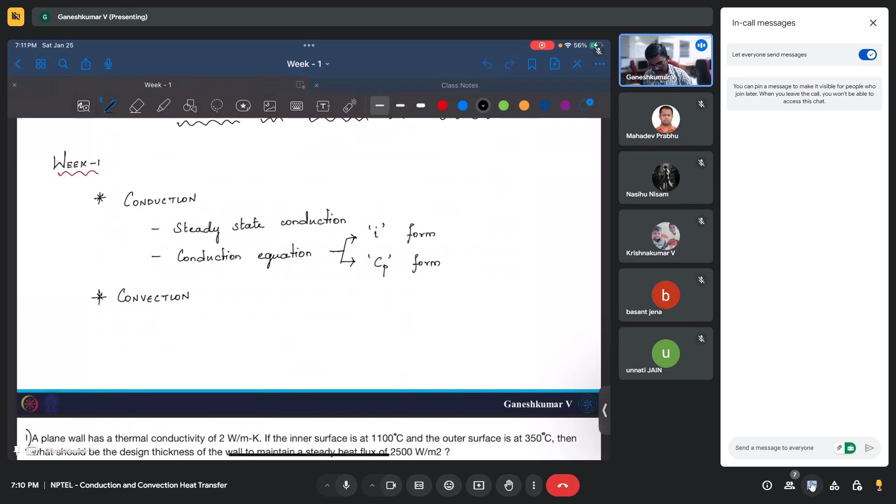I have 5 problems today. Actually I have 6, but if possible we will solve the sixth one. If not, we will solve it in the next session. Because the sixth one requires a bit about the energy equation, which the professor briefly derived, but it's not yet complete—he didn't give the full picture till the first week videos, so we should go through the second week videos also.

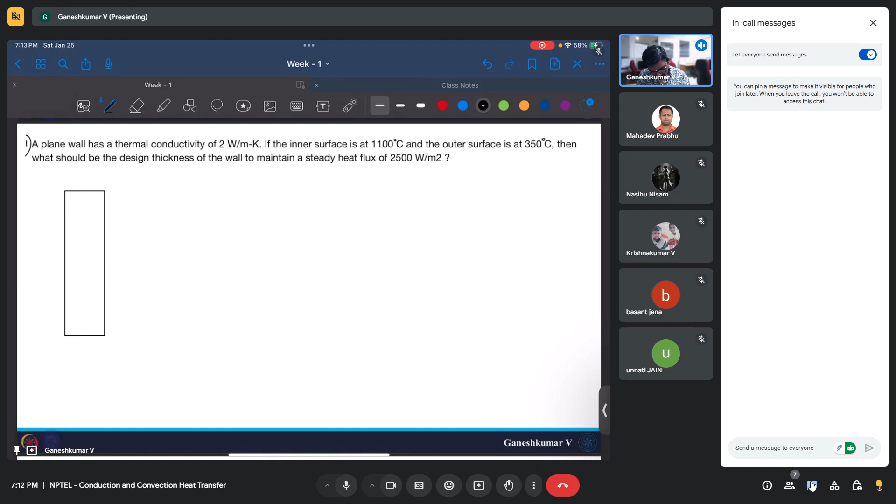Let me draw a simple plane wall so that you will get an idea what this question is about. So this is like a simple plane wall. Okay, and let's consider this as the inner side and this is outer.

Okay, so we have inner side, let's call it Ti, and outer side To. What has been given is this plane wall has a thermal conductivity of 2 watt per meter Kelvin, the inner surface is at 1100 degree Celsius, and the outer surface is at 350 degrees Celsius.

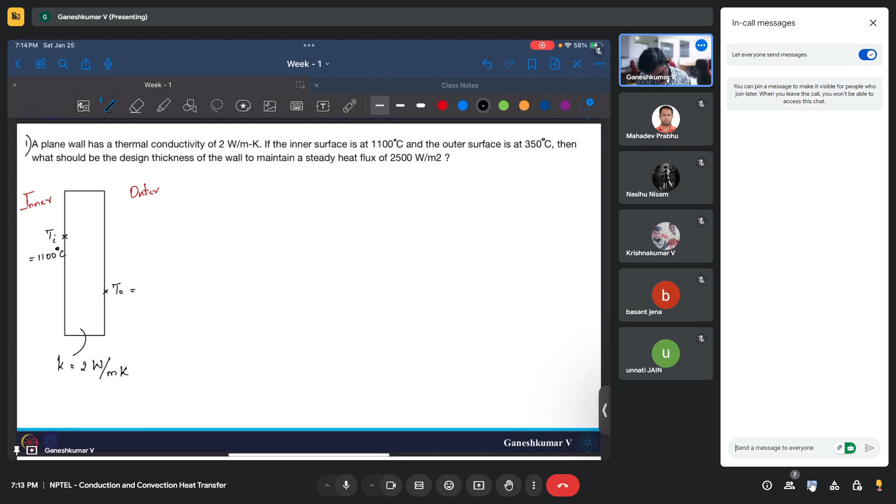What they are asking is, let's say my heat flux is steady heat flux, please note that this is a steady heat flux. We denote heat flux as small q double prime, where double prime means per unit area, the notation we usually use for fluxes. So for heat flux, this would be 2500 watt per meter square.

If we have this steady heat flux, what should be my delta x, or what should be my thickness? Let's call it L, or you can call it T. What should be this thickness is what they are asking.

Let's write down some of the assumptions we are going to take here. It's a steady heat flux, or steady state condition, which means the profile is fully generated, it is not dependent on time. The dependency of temperature field with respect to time is not there, which means T is not a function of time. T is only a function of space, that is what it means.

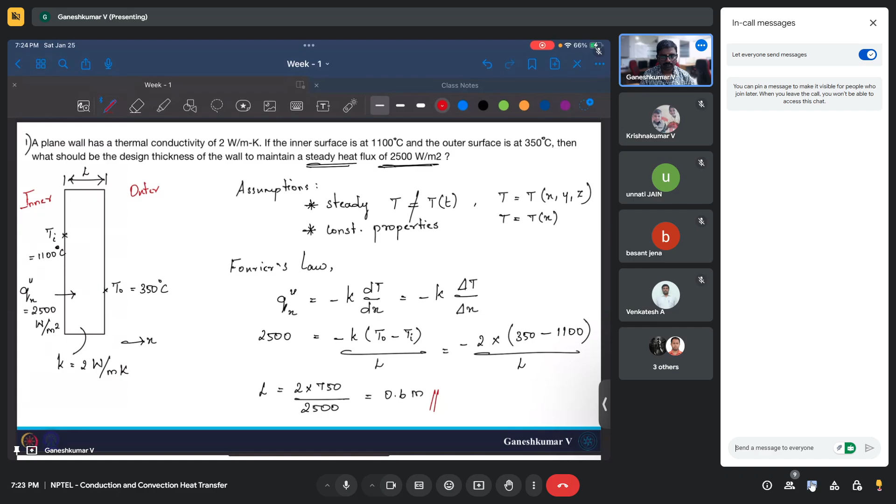All right, I think the first question is there. If there are any questions, please stop me. You don't need to wait for me to complete the problem. You can stop me at any point and ask your questions. I hope there are no doubts in the first question. If not, feel free to ask.

So if there are no questions, let me move on to the second question. This is also like a warm-up question. You guys must already know it. Let's see what this question says.

There is a back surface of a plate which is heated at a rate of 100 watts per meter square, and the front surface is cooled by airflow at 30 degrees Celsius. It is given that the heat transfer coefficient between air and the plate surface is 50 watts per meter square degrees Celsius. Considering steady state heat transfer, what is the temperature of the front surface of the plate?

Okay, so basically you have a plate. Let's say, how can I draw the plate? Maybe I'll draw it in a horizontal direction. So this is the plate, and the back surface of the plate you are heating it.

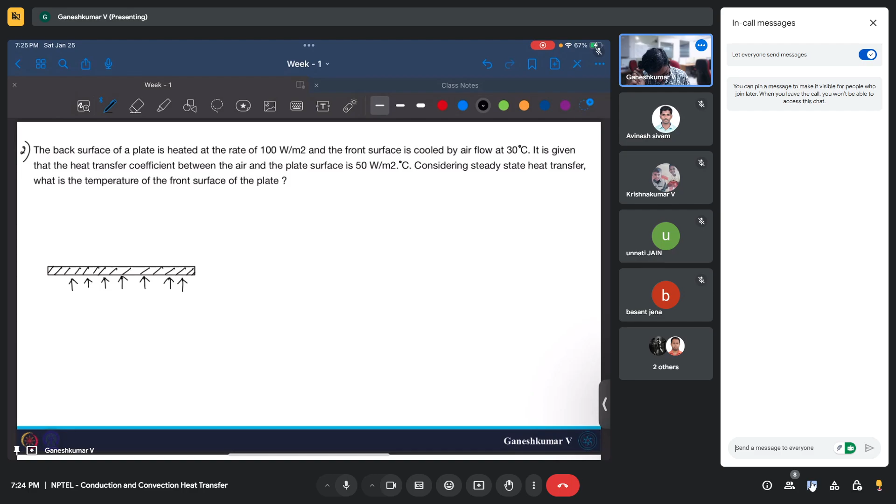Maybe I will draw this as the y direction. So Qy is 100 watts per meter square. And on the top surface you have air, which is going to cool the surface of the plate. The air temperature, let's call it T infinity, is 30 degrees Celsius, and air is flowing. Air can flow however it wants, but it cools down the top surface of the plate.

So what they are asking is, what is this surface temperature, Ts? And what they also gave is H, the heat transfer coefficient, to be 50 watts per meter square degrees Celsius.

Again, you can write down the assumptions. The assumptions will be steady state heat transfer, and also constant convective heat transfer coefficient. That is one of the assumptions we are making. And the plate is uniformly heated - that is one more assumption. The bottom surface of the plate is uniformly heated with 100 watts per meter square.

Maybe I will write it down one more time here: steady state, uniform heating. So if the plate is not heated uniformly, what do you expect to happen?

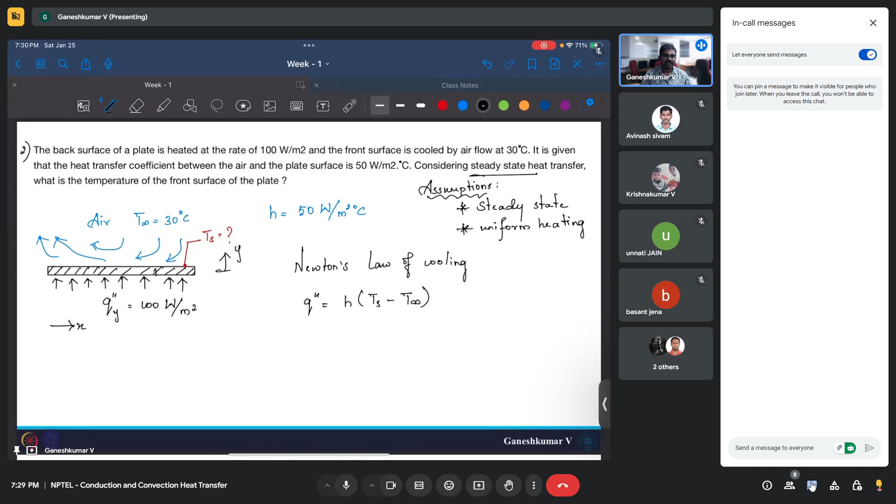H times Ts minus T infinity. We need to find Ts. H is given, heat flux is given, and T infinity is also given. So we just need to find Ts here.

Is this clear? Why didn't we use conduction? We use the convection formula here. I hope it is clear. If not, please let me know, I can repeat.

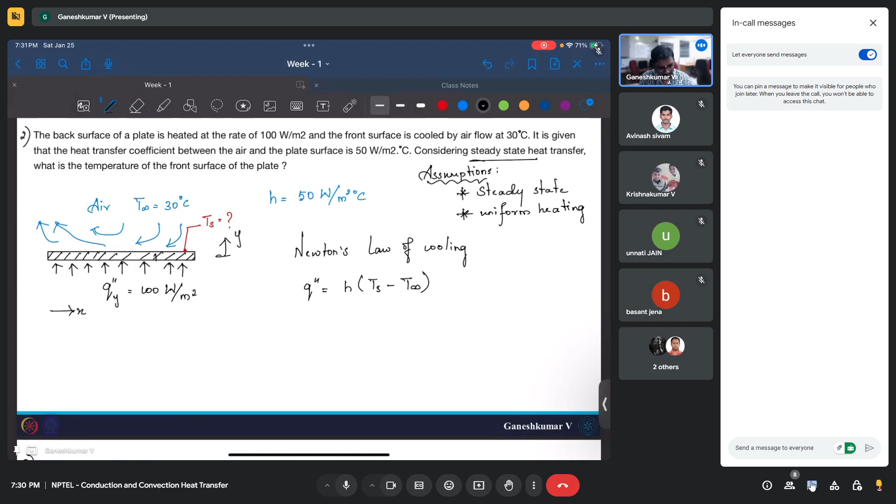So if this is the case, we have 100 watts per meter square, which is equal to H is 50, and Ts, which is what we need to find, minus T infinity is 30 degrees Celsius. If this is the case, what happens? 1, 2, Ts is nothing but 30 plus 2, which is equal to 32 degrees Celsius. This is what we are supposed to find.

So if you change the heat flux, if you increase the heat flux, the surface temperature is going to increase, right? So if I increase the heat flux to 200, the temperature becomes 34 degrees Celsius, which makes sense. If you have higher heat flux coming out, the plate would be very hot. So 32 becomes 34, that is what it means.

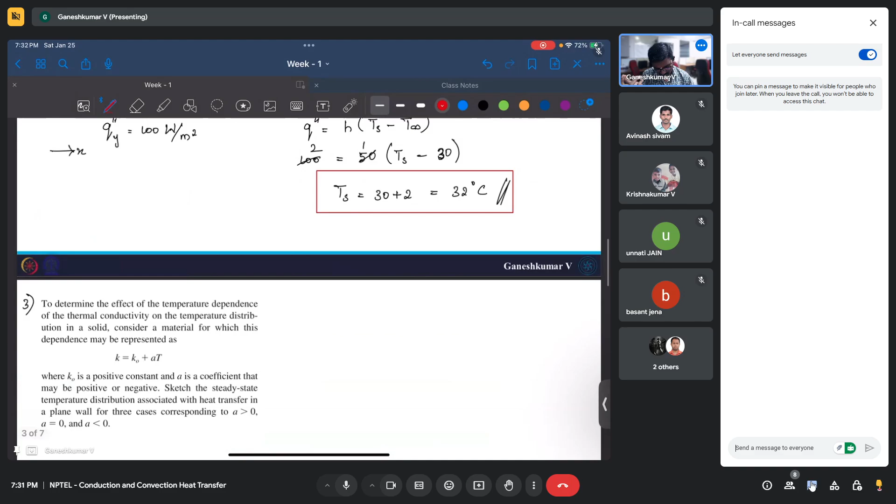All right, I hope this is also clear. This is, again, a direct application of conduction and convection formulas. If there are any doubts, please let me know. If not, I'm moving on to the third question that we have here.

The third question is a little bit different. We haven't done this in the lectures, we discussed it a little bit. The professor used to say that K, you can take isotropic, and you can take it to be constant, and you can solve it. But here it's something different.

This is more representing reality. In reality, you cannot take thermal conductivity to be constant. Let's say once you graduate from engineering and enter some industry, and you are expected to do heat transfer analysis, at that time you cannot put thermal conductivity equal to constant. It would be very nice to solve the problem that way because it would be very easy, but in reality that is not the case. Thermal conductivity varies with temperature, sometimes it increases, sometimes it decreases. We also saw that for different materials it behaves differently.

Here I'm taking a more general case. So what this case says is to determine the effect of temperature dependence of the thermal conductivity on the temperature distribution in a solid. Let's say if you have a solid and it is subjected to different temperature gradients. Now if that solid has a thermal conductivity which is a function of temperature, then how does the temperature distribution within the solid vary? That is the question basically.

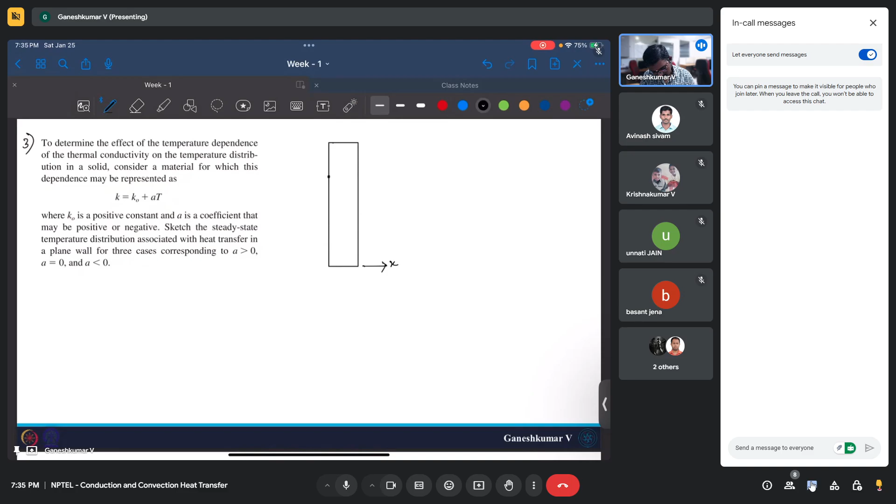Let's say this side the temperature is T1 and this side the temperature is T2. This is the X direction, so we know that temperature is going to be a function of X in this.

Let's say if I have a heat flux coming, Q double prime X, this is going to be steady state. Again, we are going to make this assumption of steady state. In steady state, heat flux remains constant, and it will be the same for every section of the plane wall. Heat flux is not a function of time.

Also if it's a plane wall, we assume it is not two dimensional, it is only one dimensional. The heat flux is going in only one direction, and if that is the case, we do not have any heat generation, which means every section will have the same heat flux.

Okay, which means basically the heat flux Q double prime X is a constant. Let me write that down also, which is the case that we saw in the last two problems also. Q double prime X is a constant. Last problem was Q double prime Y is 100 watts per meter square. In this problem, it was like 2500 watts per meter square. It is not varying with respect to X or something.

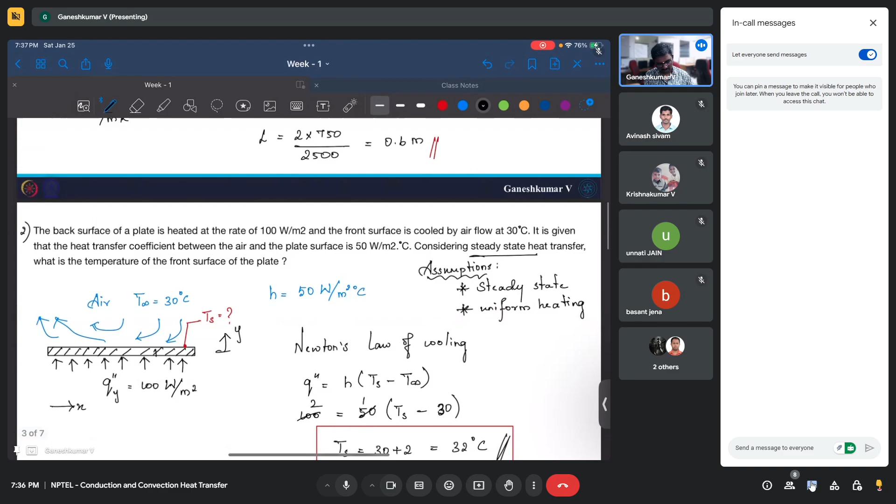So this problem also, we are going to make that assumption. And the temperature, again, we are doing only one dimension, so temperature is a function of x only. Now the question is, you have thermal conductivity which is k naught plus a*t, and a could be either 0 or positive or negative.

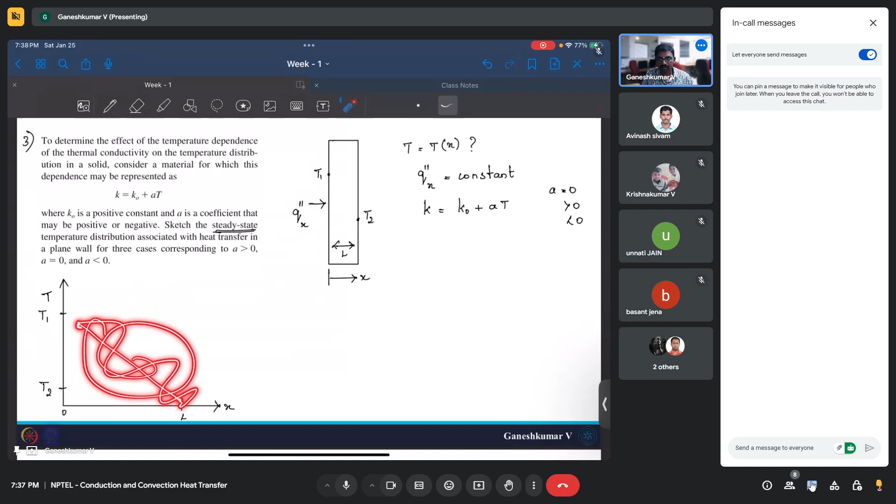Okay, all these three cases, how the temperature distribution will be is what we need to sketch. Let's say if I draw this diagram in terms of x and t graph. You have t1 here, you have t2 here, this is 0 and this is some L. Let's say this distance is L. So how will the temperature vary is the question - whether it varies linearly, whether it varies like this, how it will vary is the question.

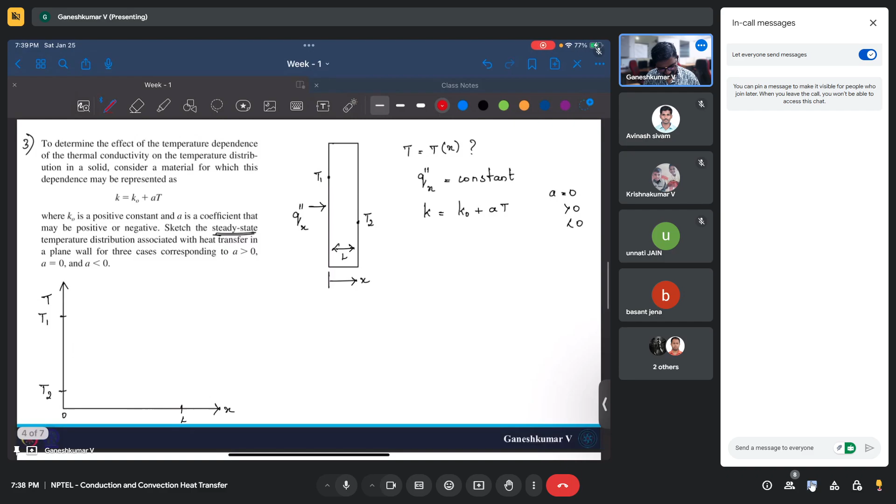Okay, so do you have any idea how we can proceed with this? I think linear. For which case? We have three cases: a equal to 0, a greater than 0, and a less than 0. So let's say I will take a case first: a is equal to 0. K is equal to K0.

K equal to k0. So how would the temperature profile look, or how will you proceed with this? K is equal to K0. How will you find the temperature profile? So your answer is actually right, it will vary linear, but how did you come to that conclusion?

One thing we can also write is, this is 0 and this is L, right? So temperature at x is equal to 0 is known: temperature at x is equal to 0 is T1, and temperature at x is equal to L is T2. Which means it is going to start here and end here. This is the starting point, this is the ending point for the temperature distribution.

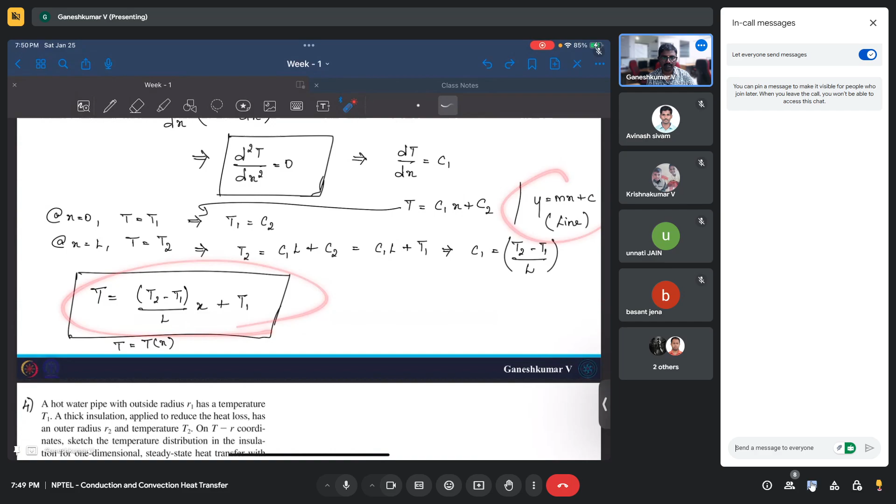And you can draw these three lines and you can write it's a straight line. Basically, you can do this for every point in this line. And then you can just plot them and see how it varies. Okay, so in this case, what happened was this is a linear line, and we also found out its equation for a line. So this is how you will find out the temperature distribution or the shape.

Now I will tell you, instead of going through all this mathematics, you can simply use your logic to find out the same thing. Okay, so this is the line, let me write it down. This is the line for A equal to 0, which means we have a constant thermal conductivity, and we know that it's going to give a linear profile, and this is what exactly we got after doing all the mathematics. Okay, you can repeat the similar mathematics for A greater than 0, A less than 0, and you can apply logics and you can find it.

But now I'm going to give you a more easier way to do this. Okay, we can just, once you know this, this itself has the idea of how the temperature profile varies. Okay, so what I said here is you have heat flux which is constant.

Before we go into that, is there any problem with the mathematics that I derived till now? I hope everything is clear. How did we get the temperature and how did we get it's a straight line? Everything, I hope it's clear. Okay, so if there are doubts, please stop me anytime and I would be happy to repeat it.

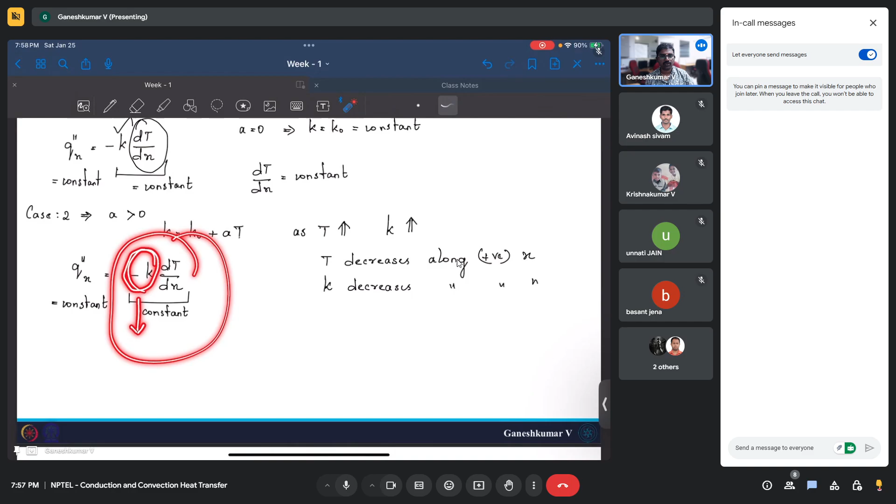Now the question is, how does dt by dx vary along positive x? Now let's try to find out what is here. The k here is decreasing with x, and now if you want to make this whole term constant, what you have to do is increase the temperature gradient. Because one quantity is decreasing, which means the other quantity should increase, so that both will cancel each other out and give a constant heat flux. So constant heat flux is true. That's why if k decreases along x, the dt by dx should increase along x, because then only it will satisfy Fourier's law of heat conduction.

Is that clear? Yes, sir. Yes, sir. Okay.

Now, if dt by dx increases along x, which means gradient is also changing, which means slope is also changing, right? If the slope increases along x, how will we draw this line? Think mathematically, you will find the answer. I think it should be uphill.

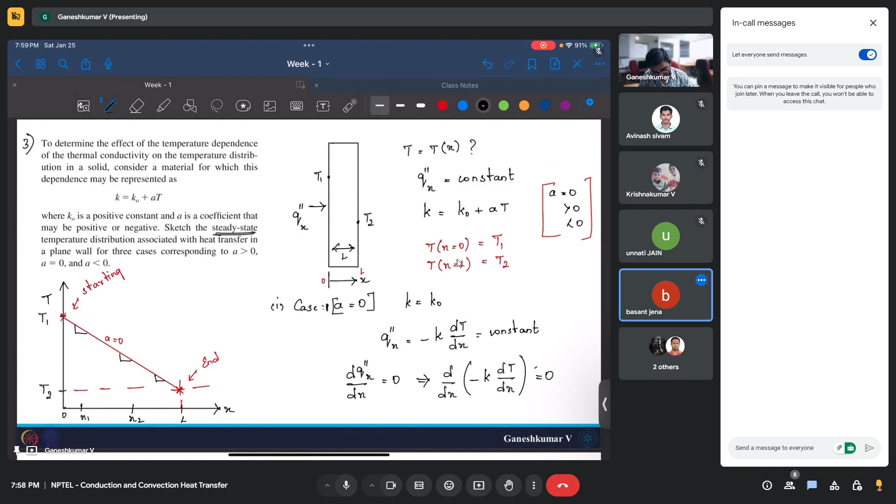It should be uphill, right. Wonderful. So again, it should start from here. It should end at T2. There is no change in that. The boundary condition is fixed. Only thing is, it will look something like this. That's it. This will be A greater than 0.

So what I'm saying is, dT by dx continuously increases. Our gradient continuously increases. That is what you see here. The gradient here is less. The gradient here is very less. However, the gradient here is very large. Which means, as you go from the temperature along the positive x, the gradient is continuously increasing.

Okay, so let's say if I want to draw how the gradient varies along x, this is another graph. This is x, this is dt by dx. Actually, gradient is negative, so...

This is x. So this is for a equal to 0, and when x increases, dt by dx continuously increases. And it increases in the negative direction. That is something you need to note. It increases in the negative direction. This is for a greater than 0.

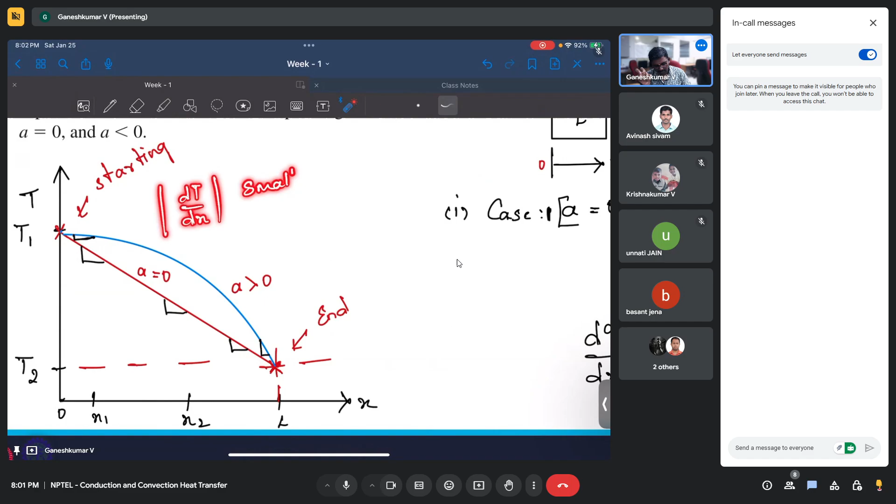Yes, sir. The dt by dx is small here, but also it's negative. That's why I plotted in the negative direction. The plot is something like this, in the negative direction.

In the fourth quadrant you will have very small gradient over in your x is equal to 0. However, you will have a very large gradient at x is equal to L. This corresponds to a very large gradient. That is why you will have a gradient to be decreasing.

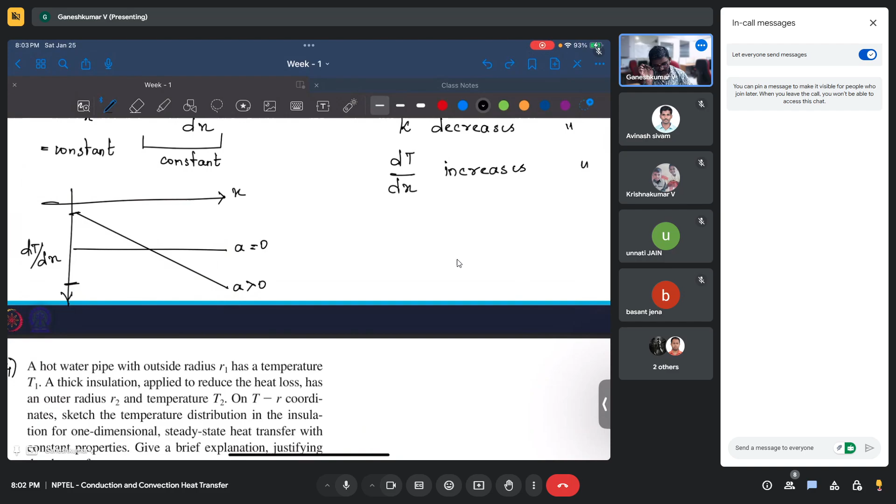And one more thing, this need not be a straight line. It could be something like this also, it could be something like that also. However it can be, but it should continuously decrease. We don't know exactly how dt by dx is a function of x, but only thing is it strictly increases in the negative direction.

All right, so that is how you got this profile. This is for a greater than 0.

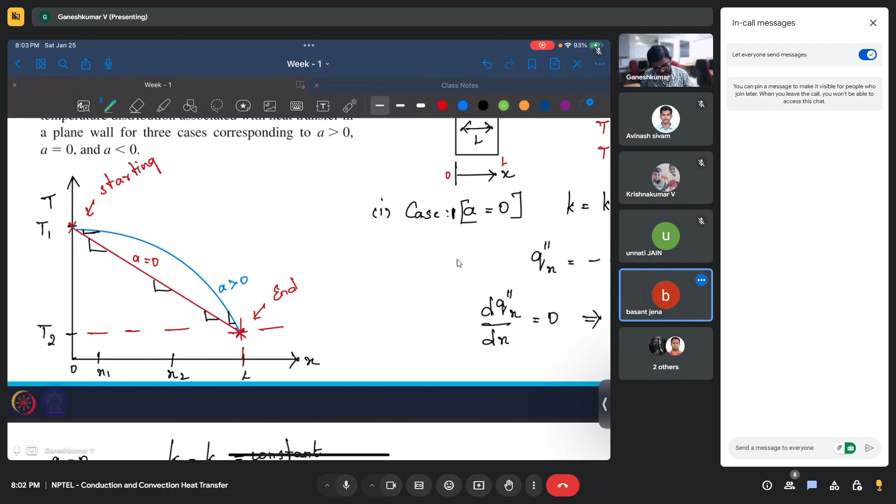Now you guys can directly say how a less than 0 would be. It's going to be just opposite of this. You can repeat this same thought process, and you can see for yourself how it will vary. So it is going to vary as you suspected, something like this.

Sir, will all these recordings be available to us? Yeah, it will be available, don't worry about it. Okay, sir. Thank you. Thank you. But if you have doubts, don't feel shy. I will be happy to explain multiple times. Once we have to do it ourselves, no problem, it will be helpful. No problem.

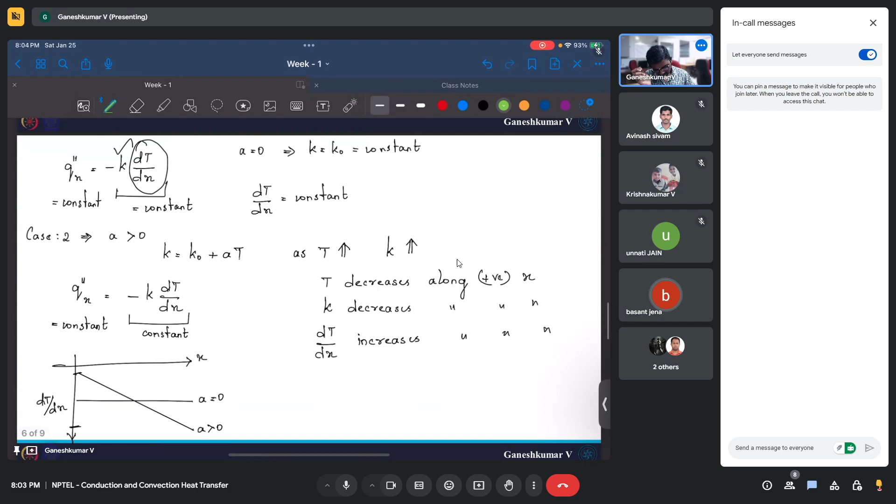Right. So this is the second approach. This is the easiest way, just based on thinking, you can find out how it will vary. The other approach is you can do this derivation again, and you can come up with this expression, and you can plot that using a software, let's say MATLAB or Excel sheets. If you're plotting it, then you will come to know it also varies like this. So it's a very far-fetched process. Instead you can just simply use an intuitive approach, and you can find it.

All right, I hope for question 3, I skipped a few parts - the case where a is less than 0. I didn't do it, but I hope you understand the gist, and you can do it on your own.

All right. All right.

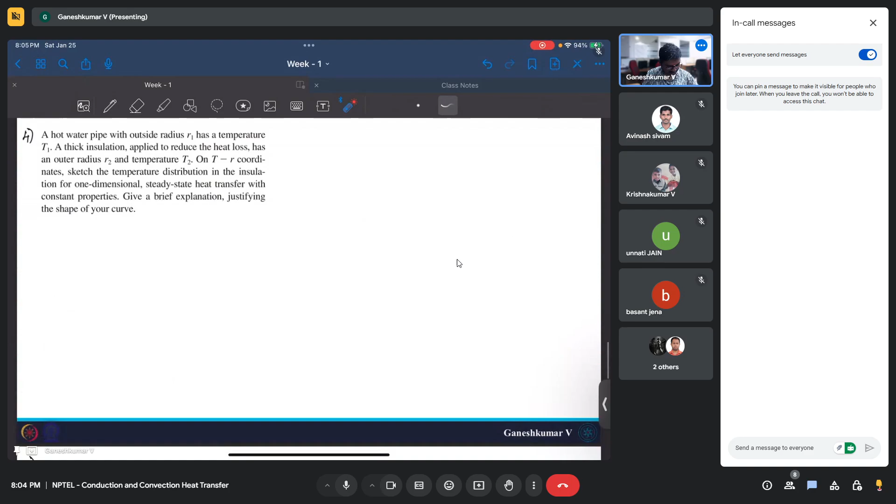So I thought I would be able to finish this by 8, but it's taking some more time. We'll quickly go through these two questions, and then I'll leave it up to you guys to ask any questions. So the fourth question is a little bit different, which we didn't touch in the lecture,

because it's in cylindrical coordinates. Till now we studied only Cartesian coordinates. Now we are going to do cylindrical coordinates.

Here we are talking about a hot water pipe with outer radius R1. There's a pipe, and hot water is flowing through it. It has outer radius R1 and temperature T1. Now we are applying some thick insulation to reduce the heat loss. So when you apply insulation, the heat loss reduces, and it has an outer radius of R2 and temperature T2.

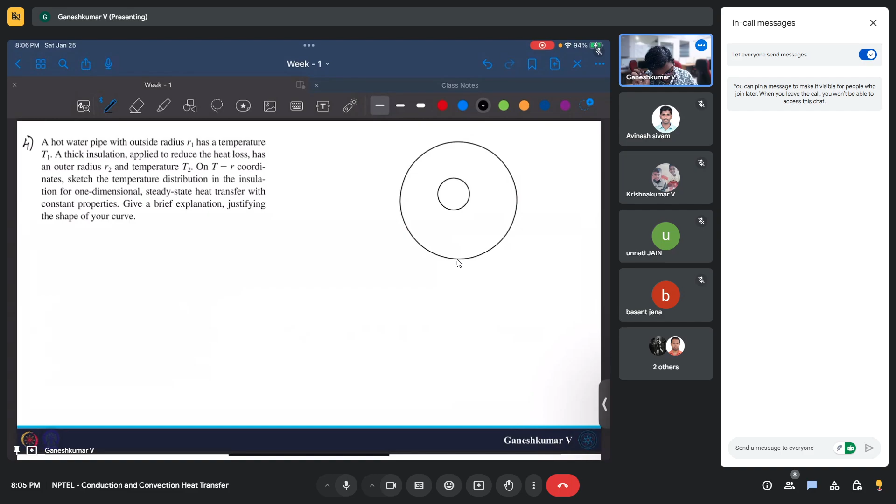Okay, so let me draw it. You have this hot water pipe with radius R1, and you have a bigger insulation with radius R2. Ideally it should be in the middle. So this is R1, and this is R2 - this is the insulation. Or probably you might think that it is water - sorry for the color choice - but this is the insulation.

Now this is at T1 and this is at T2. Now what they are telling us is: on T minus r coordinates, sketch the temperature distribution in the insulation for one-dimensional steady state heat transfer. You can assume steady state, constant properties, and one dimensional. Give a brief explanation justifying the shape of your curve.

What would be the temperature distribution if you were going along the R direction? Let's say this is the direction you are going for. How would the temperature vary? Basically in the previous problem, we studied how temperature varies along the x direction. Here we are trying to find out how it varies along the r direction.

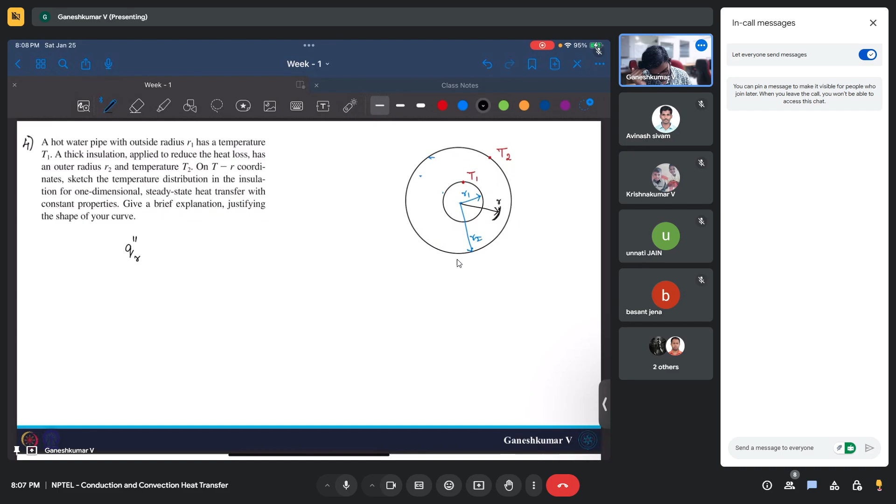Again, it's a steady state heat transfer, so we have heat flux to be constant along the radial direction. That is one difference. So let's say heat flux is equal to constant - or in this case, I'm going to write it in terms of heat, not heat flux. The heat is constant. We will understand why.

So there is this water flowing, and it is hot, and the ambient temperature is cold. So there's a potential - the heat flows from the hot water pipe to outside, but in between it sees insulation. So a lesser amount of heat passes through, but it doesn't mean the heat does not pass through at all. So there's going to be some heat loss to the surroundings. Now, when you have heat loss to the surroundings, along the r direction, the heat will be constant.

We will see how the heat flux varies. First, let's understand that if heat is constant, we can apply Fourier's law. Fourier's law, again, is the same: k times area times dT by dr. Here it is in terms of radial coordinate. Now the question to you guys is, what is this A? How will you write the A?

So we all know A is the surface area - the internal surface area, for any radial direction. What will that be? It will be the circumferential area - circumference multiplied with length. So A will be the perimeter, which is 2 pi r, the perimeter, into length.

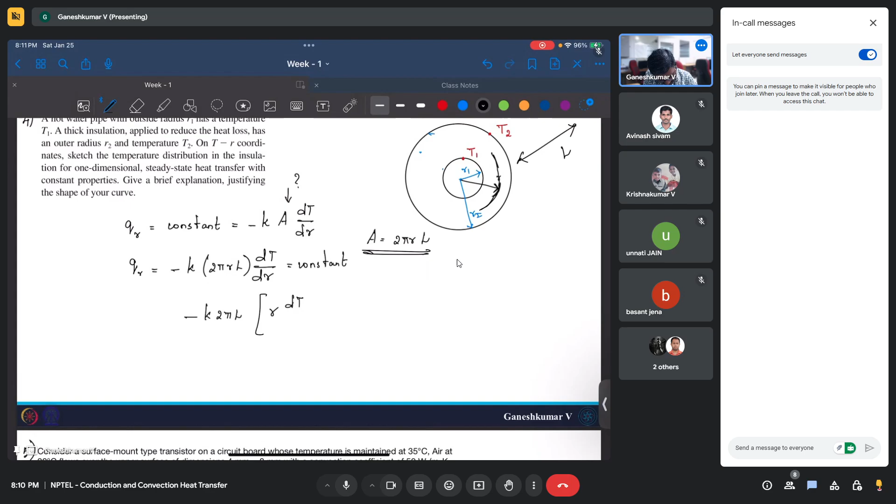So we can write this Q_r to be minus k into 2 pi r L times dT by dr. Now we know this is going to be constant, and 2 pi and L we take to be constant, so this boils down to r times dT by dr. Let me write down the equation: minus k 2 pi L times r into dT by dr is equal to a constant.

And I can club all the constants - these are also constants - so I can write the equation as r times dT by dr is equal to some constant, maybe I'll call it C1. So this is what the Fourier law of heat conduction along the cylindrical coordinate says.

Now from here we need to find out how T varies with respect to R - this is our goal. So similarly we need to draw a graph to show this. Let's say if I draw it, this is the radial coordinate, this is temperature. I want to know how it varies along R.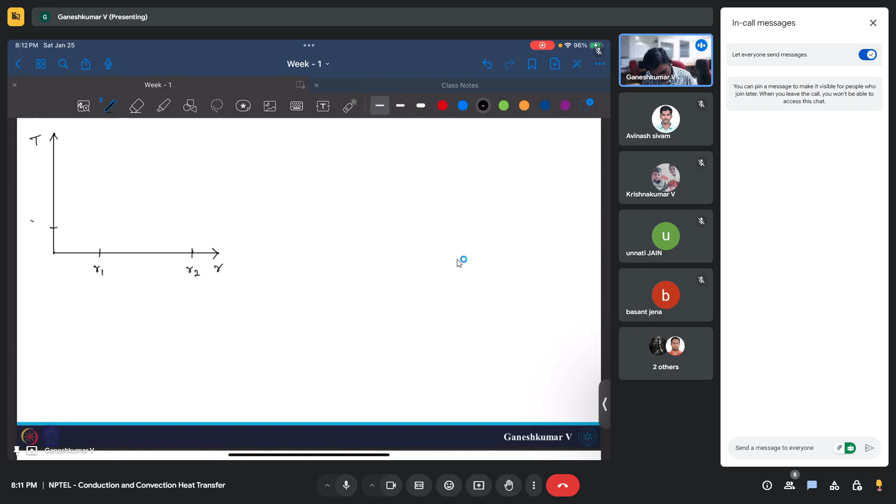So let's say I'm going from R1 to R2, and at R1 I have T1, and since it's hot water, T1 is going to be greater than T2. So at R1 you have very high temperature and at R2 you have low temperature - let's say if I extend this line, my starting point is here and I'm going to go here.

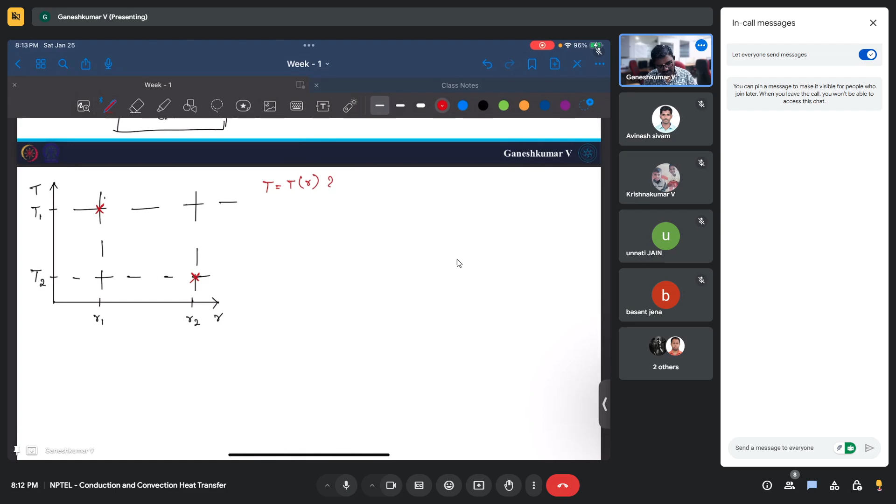Now the problem is how this T is going to vary in between R1 and R2 - what is this T as a function of R, that's the question. And for that we have a solution: R times dT by dr is constant. Now you can apply mathematics to rigorously derive it and express the solution, or you can apply some logic to tell how it varies.

Do you guys have any idea? You can apply the same logic. So maybe let me help you here - you have dT by dr equal to C1 by R.

So now your temperature gradient along the radial direction is also a function of radius. It's going to vary with respect to 1 by R, which means as R increases, the temperature gradient reduces - the gradient is more when R equals R1, and less when R equals R2. Based on this logic, we can draw this line.

So the gradient is going to be more, meaning it steeply drops at R1, and the gradient is going to be less as it reaches R2, because R2 is larger - the gradient is small near R2. So it's steeply dropping, and then as it goes down, the temperature gradient continuously reduces to a very low value at the end.

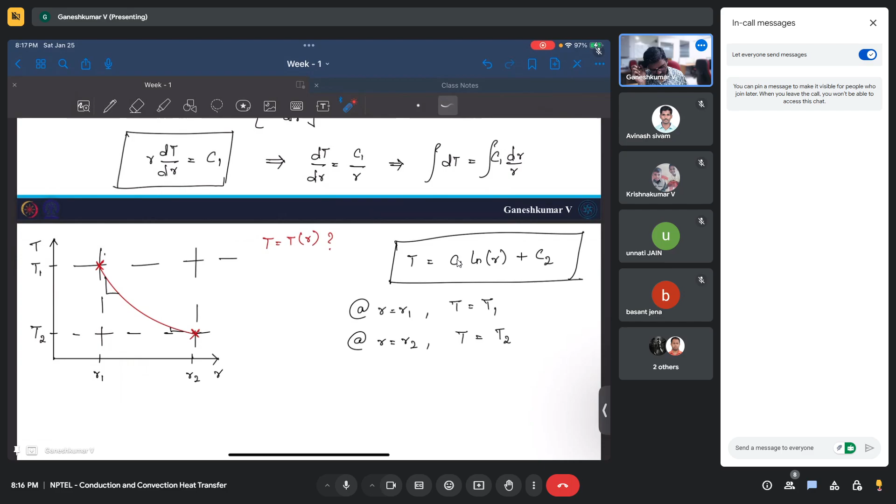Okay, and we know the boundary conditions. What are the boundary conditions? At r equal to r1, t is equal to t1, and at r equal to r2, t is equal to t2. Now you apply this boundary condition, and you can get the temperature profile. You can plot them in Excel or wherever you want, and then what you see is it is going to vary something like this.

Okay, so these are some important understanding that you need to have. The way you try to perceive this problem will be very helpful. Let's say if you are going into an interview, or if you are going to write a GATE exam also, these kinds of questions will be a lot. So how the temperature profile varies, how this works - at that time, a proper way of analyzing these concepts would be very helpful rather than deriving this mathematical relation. And we do not have access to plotting softwares while we are in a time crunch like interview or exams. At that time, this idea of how the mathematical graphs vary, the calculus idea, and the understanding of temperature gradient and the profiles will help you get a rough estimate of how things vary.

Okay, so you try to practice these kinds of problems if you get a chance, and all these problems I usually take from the Heat and Mass Transfer by Incropera book. Which I find important and necessary to discuss, those problems I usually pick for you to show. So you can find similar problems a lot in Incropera.

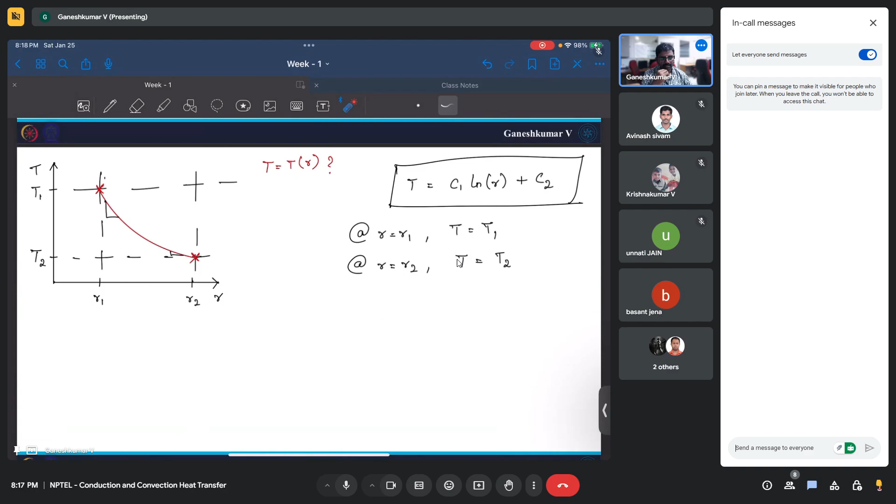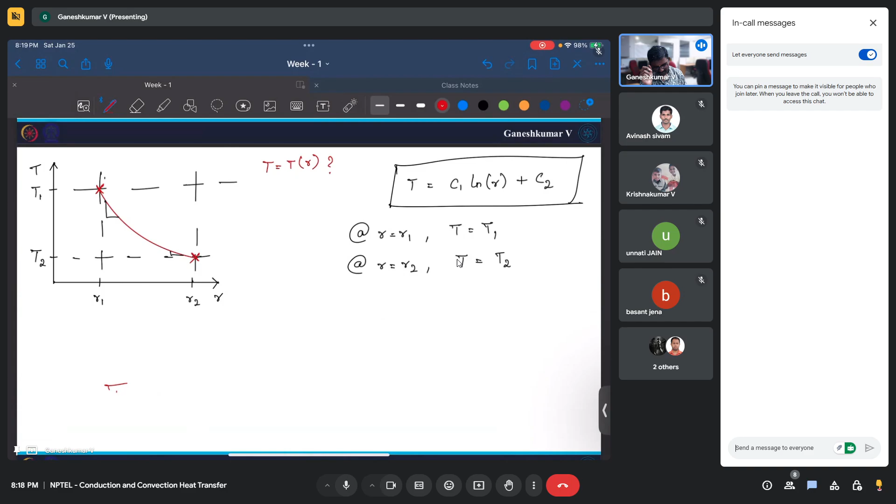It would be very helpful, sir. What is the name of the book, sir? It's the Fundamentals of Heat and Mass Transfer by Incropera. It's a famous book in heat and mass transfer. It's one of the suggested books for this course also. Okay, I think it's Fundamentals of Heat and Mass Transfer. Okay, thank you sir, thank you.

Okay, so you can get it. I will also, if I get a snapshot of the first page of the book, I will add it in this PDF and I will upload so that you can find out from there also.

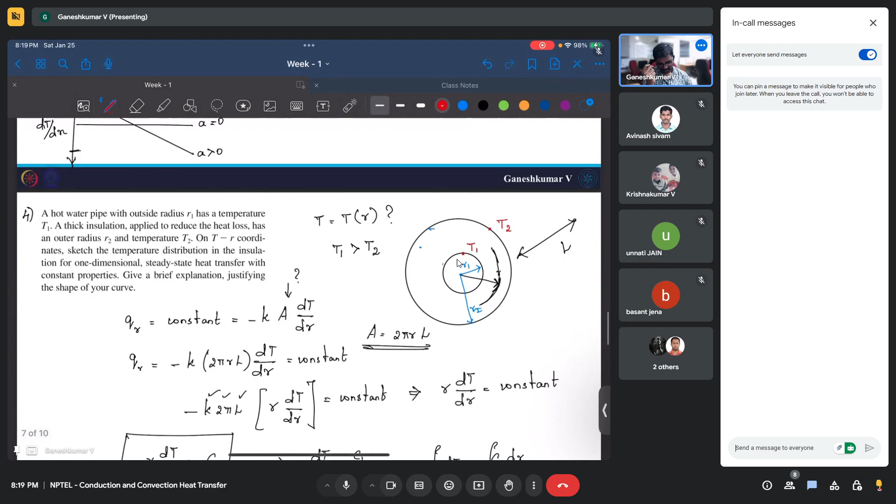All right. Any questions? Any questions till now? I think it suddenly went into mathematics and calculus, and it might be a little bit boring, but it's good to understand these concepts. So I hope there is no question.

So we are already at 8:20. Anyway, session is still until 9 o'clock. What I will do is quickly in 10 minutes I will go through this problem. If possible, I will complete it, or I will let you complete it. It is straightforward, but some important insights I will give you. Based on that, you can complete it on your own.

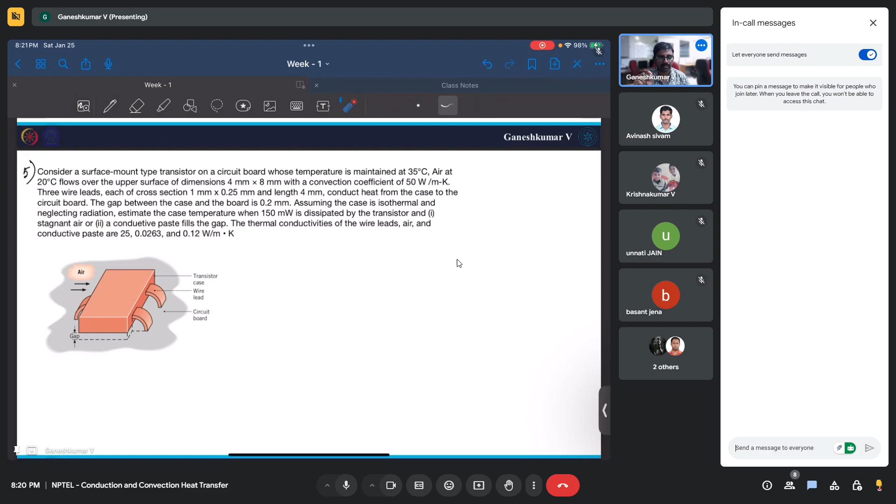So this problem actually involves a little bit about energy balance. Professor Suman Chakraborty was very nicely explaining about momentum balance, and then he directly converts that into energy balance. If you haven't seen that video, I strongly recommend you look at it - I think it's the fourth or fifth lecture of this week. So we are going to use those concepts a little bit, and that concept is very powerful. You can use it anywhere, and you can arrive at the solution. It gives you a lot of insights. Okay, so let's see how we are going to use that here.

Consider a surface mount type transistor on a circuit board whose temperature is maintained at 35 degrees Celsius. Air at 20 degrees Celsius flows over the upper surface of this transistor with the given dimensions and a convection coefficient of 50 watts per meter Kelvin. So which means, like, you have this circuit board - this gray part is the circuit board, and on top of it you have this transistor, or you can say IC.

Any chip you have, this chip over here, there is air flowing all on the chip, and the convection coefficient or heat transfer coefficient over that is 50 watt per meter Kelvin.

Now what they are telling is there are three wires coming out of this transistor and it goes to this circuit board. These three wires have some cross section and some length, and they conduct heat.

So you should note here they conduct heat from the case to the circuit board. This is the transistor case. From transistor case to circuit board they have these wires. These wires, in addition to electrical signals, also conduct heat with some thermal conductivity which is also given.

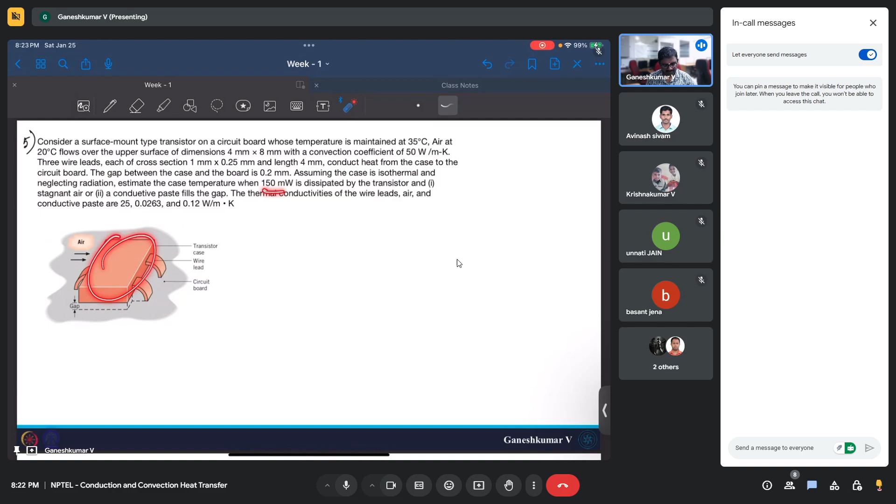Which means when there is an electrical signal given, or when there is a voltage given, power given to this transistor, it is going to generate heat, and the heat generated over here is 150 milliwatt. Whatever heat is generated gets conducted through this wire to the board. It also gets convected by the air, and also gets convected by the air in this small gap. So there are three kinds of heat transfer.

So one thing is it gets conducted along the wire, it gets convected by the air through the top surface, and also it gets dissipated by the transistor from the stagnant air at the bottom.

When you say here the stagnant air, it is not the same as convection. Here it is also conduction. That is something you need to remember. So if you have stagnant air, that is also one way of heat transfer happening over here, along with conduction through this wire, and convection on the top surface.

Now what they are trying to find out is what would be the temperature of this case. That is what they are finding. Now we are assuming it to be isothermal, which means the entire case is at the same temperature. That is another simplification.

In reality it will not be - the temperatures will be continually varying at all these points, there will be a distribution. But we are going to assume it's isothermal, and if we say it's isothermal, we just need to find out one temperature, which is Tc. What is this Tc is what we are trying to find out.

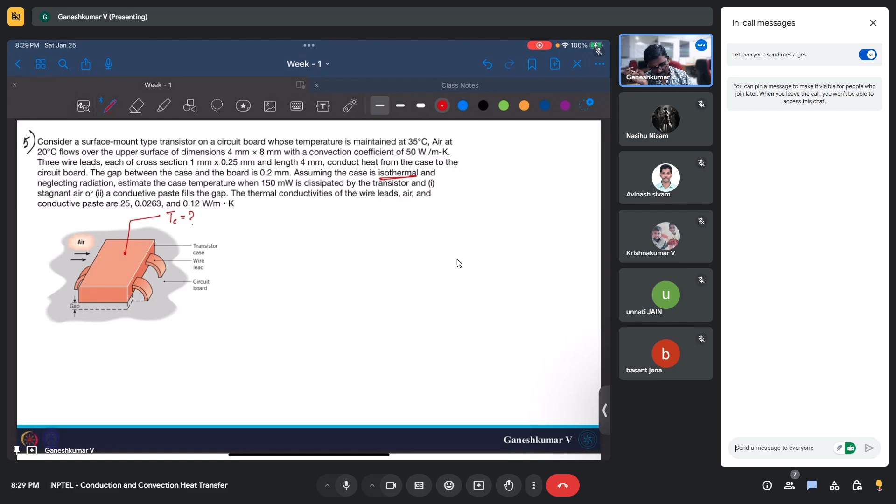Now when I say it's a transistor, what it means is this thing that I have here, I'm going to draw it in dotted line. No sorry, we are interested in only the transistor, we do not need the wire. So we want only the case temperature. So we will base our area of study only on the transistor.

If that is the case, now you can write, as Basant Jena said, the energy balance to be E dot in minus E dot out plus E dot generation is equal to E dot stored. Basically, whatever comes in minus goes out plus whatever is generated will be the change in energy of that system, or the energy stored, or rate of change of energy within the control volume. All are the same, E dot stored.

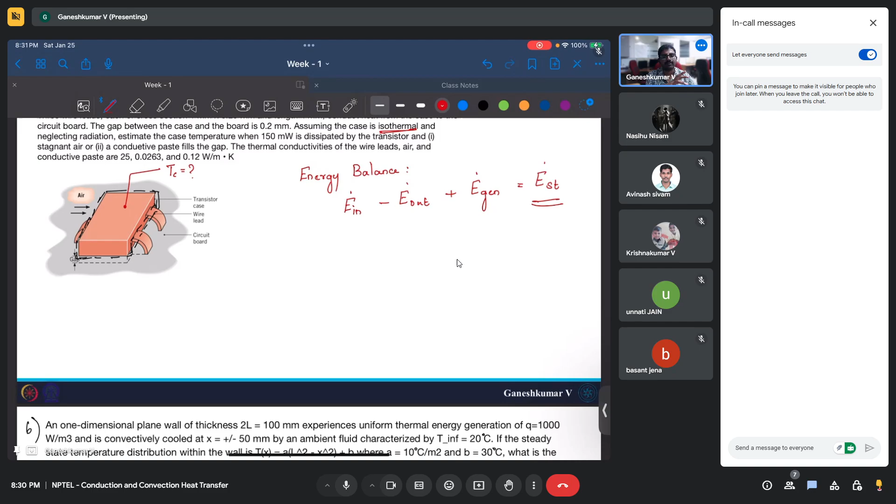Now, this rate of change of energy within a control volume will be present only if it is an unsteady problem. Here we are going to deal with a steady state thing, so we do not have this term. Basically what I'm trying to say is this transistor's energy does not vary with time. It generates and it dissipates through different modes like conduction and convection. Whatever is generated is getting dissipated. Then only will you have temperature as not a function of time, then only will you have a steady state system. So that is what we are going to do. We are going to assume it's a steady state system.

Okay, you are also told the case is isothermal, which means the temperature does not vary within the case. It's a single temperature, the same everywhere. That's what it means. So now this boils down to...

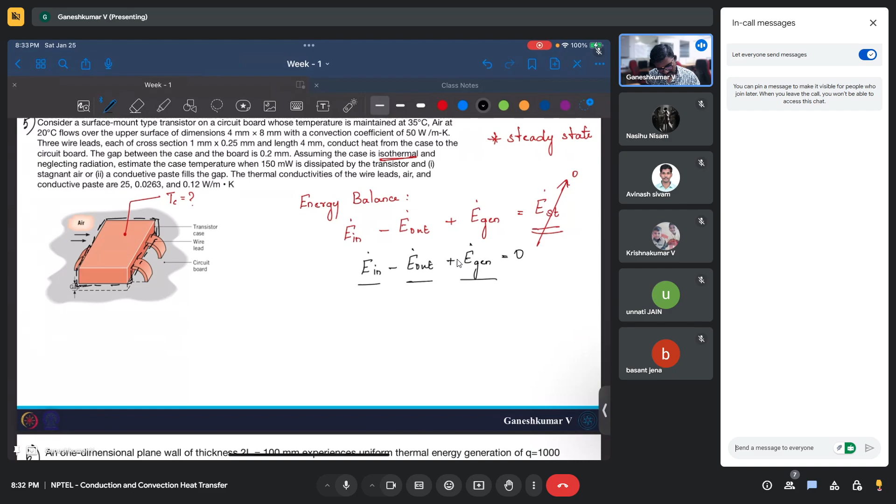E dot in minus E dot out plus E dot generation is equal to 0. Now, do we have any heat? We need to find out what is E dot in, E dot out, and E dot generation based on this. So do we have any energy coming into the transistor in terms of heat? Here we are interested in heat. Is there any energy coming into the transistor?

So you can understand this transistor is generating heat and it is dissipating heat, which means it is sending out all the heat through conduction through wires, through convection of air at the top surface, and also conduction at the bottom surface. So there is no energy coming in, exactly right. So we do not have any external energy coming in.

So when you say E dot in, it has to cross the boundary of the control volume. The energy should cross and get into the system. That is not happening. Only energy is going out of the system through wires, through convection by air, through the stagnant air below. Only energy is going out, energy is not coming in. If these are across the control volume, it has to enter from external. So in that way, the E dot in is actually 0.

And what are the E outs? We have a lot of E outs, right? One form is through the wire we have Q conduction going out. Sorry, there are three modes of energy out. Three modes, that's right. Wonderful. So you have Q wire, in fact I'll say wires, because we have three wires going out. So you have Q wires, which is conduction,

and you have Q air at the top surface, which is convection. Let me write it as top. And what you also have is Q air, but it is stagnant. If it is stagnant, if the air is not flowing, it will be considered as conduction. Right, wonderful, this will be considered conduction.

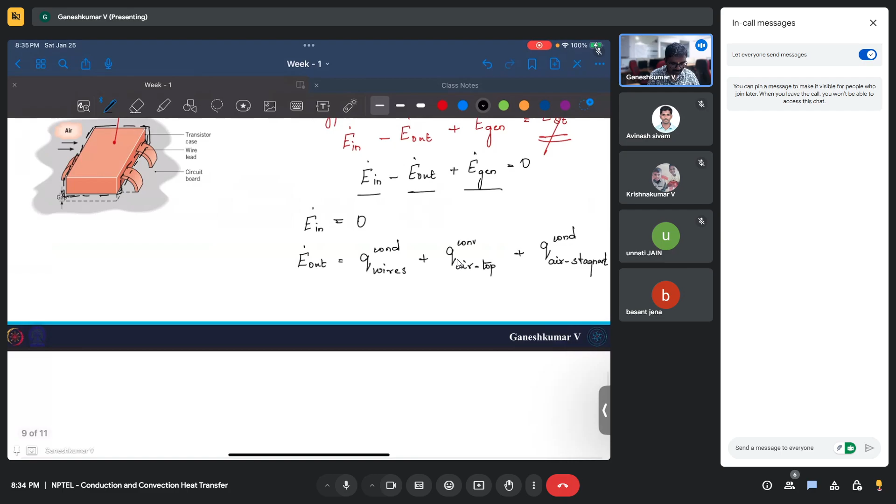Now what you have to do: conduction we know is Fourier's law of heat conduction, convection we know is Newton's law of cooling. You just need to substitute those expressions. That will be our E dot out. Okay, let me write one more step in this.

So we have three wires, so we need to multiply by 3. So it's 3 times Q conduction of one wire, which would be minus K times area of the cross section of the wire, times dt by dx, or delta t by delta x. Now the important thing is what is this area, what is this delta t - that's the important thing. We will come to that.

And this is one thing. And the Q convection is Newton's law of cooling: area of the top surface of the case, and then T case minus T infinity. This is Newton's law of cooling.

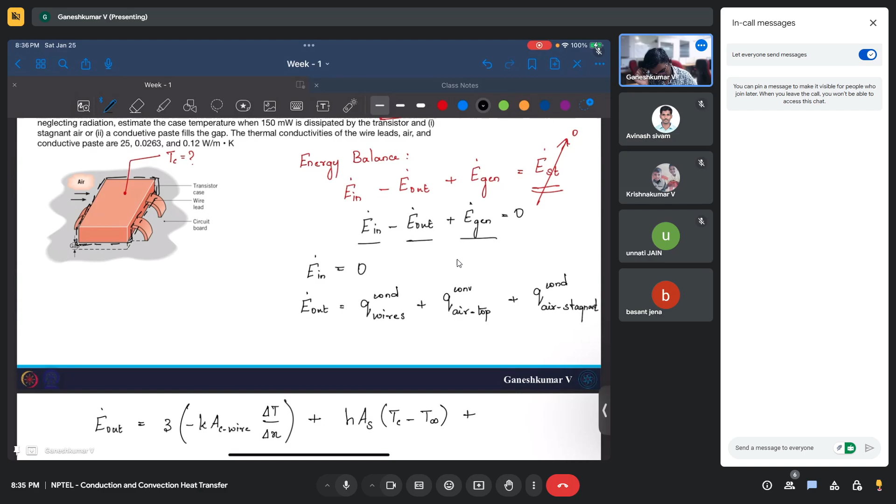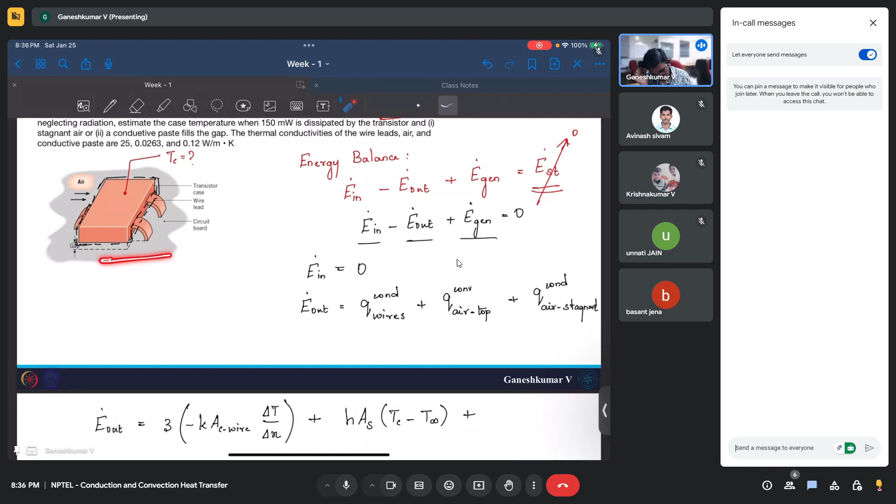And at the bottom you have stagnant air. This is the bottom surface you have. Here the stagnant air is there, through which conduction goes to the circuit board. This is the gray area, it goes to the circuit board.

So which means you will have another minus K. Here it will be air, and again here it will be wire. So K air, and surface area at the bottom, let me write SB here, ST, times delta T by delta X.

All right, now the question is, what is this area of cross section of the wire? Which area would that be? So here we see from the problem statement, you have three wire leads, each of cross section 1 mm by 0.25 mm, and the length is 4 mm. So the cross section means this is the cross section.

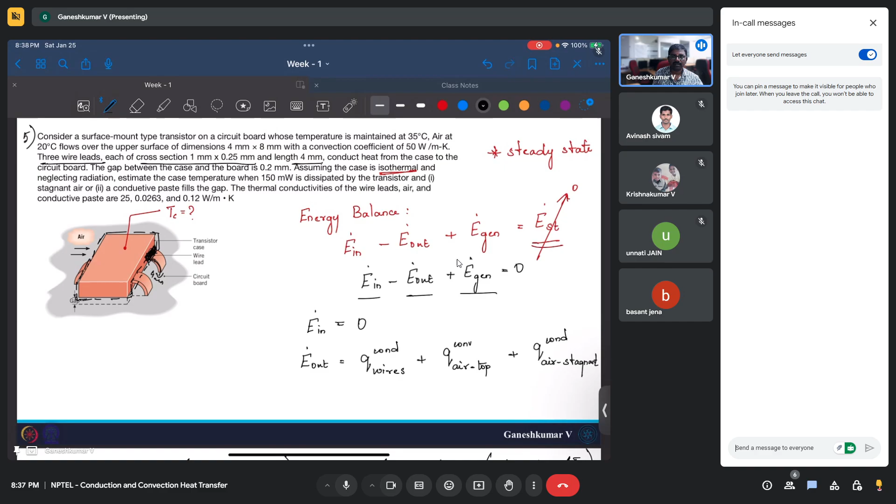That part is the cross section, and across this the wire goes down. The wire length is 4 mm, and the cross section here is 1 mm cross 0.25 mm. So please be careful, this is 1 mm cross 0.25 mm, and the length is 4 mm, which is going to be your delta x. This is going to be 4 mm.

Now the delta T would be, what would be the delta T? This is the circuit board, so the board temperature is also given. T board, circuit board is 35 degrees Celsius, and you have T infinity, which is 20 degrees Celsius. That's also given. Now let me draw this wire separately so that you will get an understanding.

I think there is some mistake, sir. I think the cross section is... could you please show me? Oh, the 0.25. Point two. Okay, exactly point two. Yeah, thank you, sorry about that, this 0.25. Thank you very much.

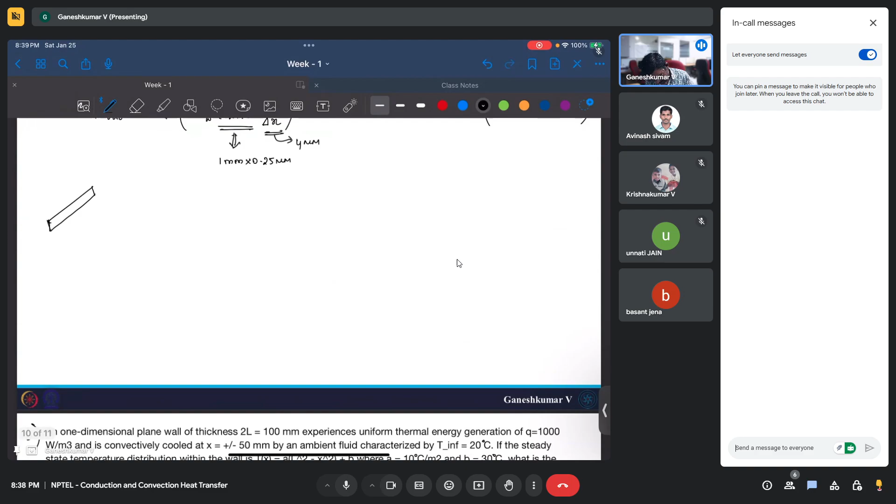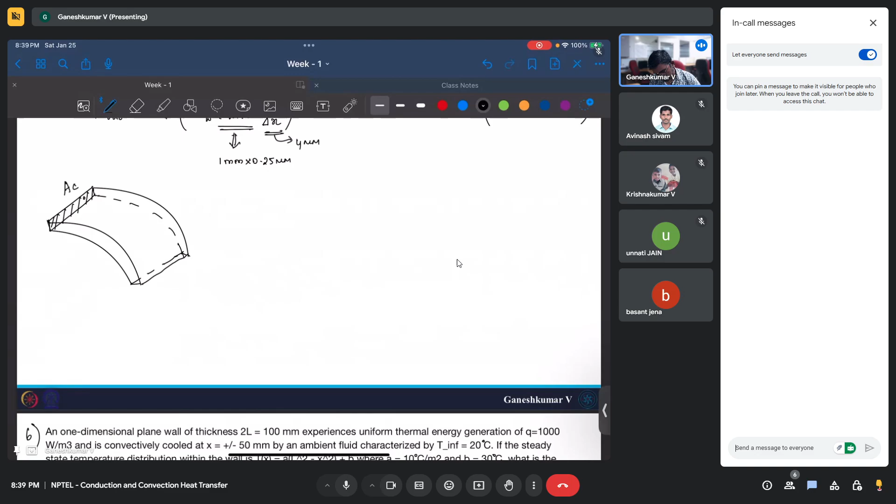So now if you have the wire, this is the wire, this area I'm talking about is the area of cross section. And here the temperature is Tc, this is the case temperature. As I said, it's uniform, whether it's top or bottom doesn't matter, it's just case temperature. And the bottom that you have here is at Tb, this temperature is at Tb.

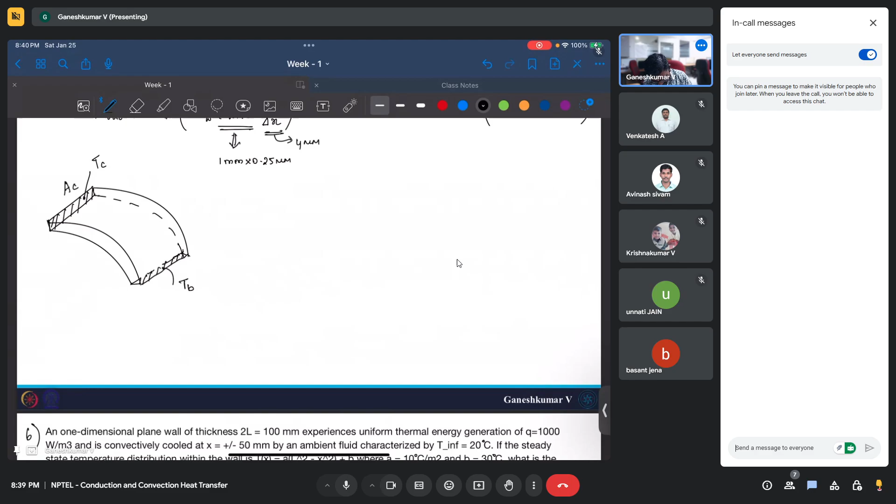And the distance, the length of this wire along this curved path is 4 mm. Across this only conduction is happening, the conduction is happening like this, Q conduction. I hope it's clear when you draw it in a bigger thing.

Yes, okay, now you can find what is delta T. This delta T would be TB minus TC. Now TB would be lower, TC would be higher, so this will be negative, but you have another negative in front, so it will be positive, which means Q is going out. So we are adding everything in the E dot out. Q is going out, all right, I hope it's clear.

Now for convection it should be a little bit easier. So air is going on top surface of this case. Whatever the case surface, upper surface dimension is given, 4 mm cross 8 mm will be the surface area across which convection is happening, and we know h is given, that is also fine. Now we have bottom surface of this case and the gap.

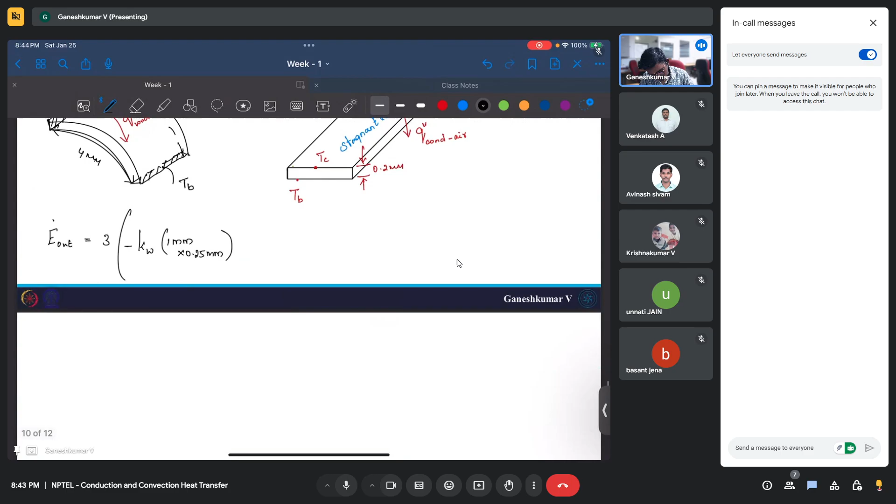divided by 4 mm, that is the length of the wire, plus H of the air, area here is 4 mm cross 8 mm, times Tc minus T infinity, plus minus of K air times 4 mm cross 8 mm, which is the area of the stagnant air, times TB minus TC divided by 0.2 mm. Other things I'm not substituting because those are given already in the problem statement.

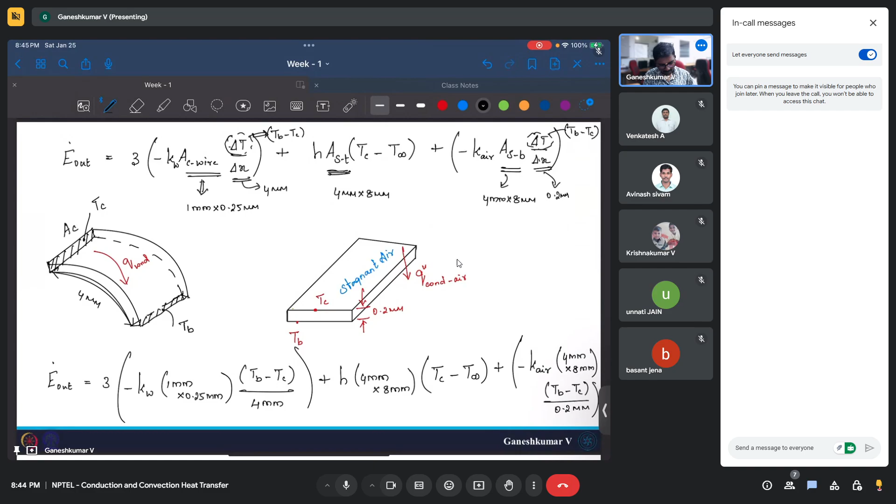You can just simply substitute it. This is the E out, you can find the E out in terms of TC. All right, so E out is done now. So E in is 0, so E out is done. Now E dot generation, E dot generation is 150 milliwatt, that is also given.

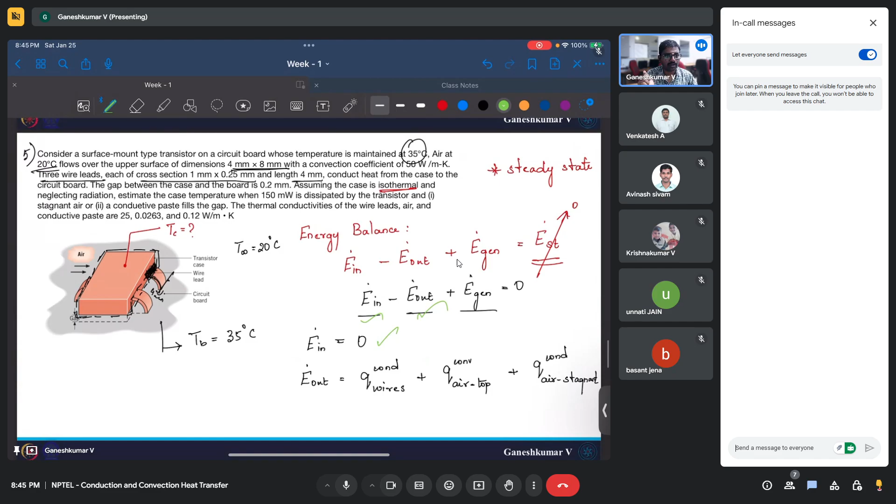E dot generation is 150 milliwatts, so it will be 150 into 10 power minus 3 watts. Okay, now what you have to do is E dot in is 0.

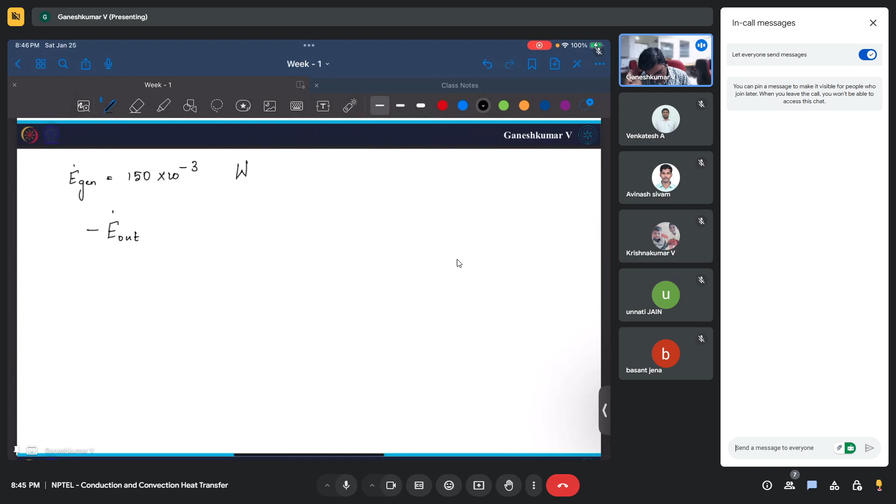So minus E dot out plus E dot generation is equal to 0, which means you just need to equate E dot out is equal to E dot generation, which we already know. You just substitute them here, and we know everything.

We know K wire, we know TC we need to find, T base 35 degrees Celsius we know, H we know, I think it's 50 watt per meter square Kelvin, and T infinity is 20 degrees Celsius. Here also T base we know, K air we know, everything we know except TC.

Here we don't know TC, here we don't know TC, here E dot generation is 150 milliwatt. You equate these two, you will end up having TC. I'm not solving here, probably I will give you the answer.

So when you use air as a stagnant gap filler, if that is filled with stagnant air, you will have a temperature of, how much did I get, 47 degrees Celsius. You can check for yourself.

And what also they were asking is, let's say if I replace that stagnant air with the conductive paste, the thermal paste, then I will have a different thermal conductivity. Wire leads, air, and conductive paste thermal conductivity is 0.12, however air's thermal conductivity is 0.026, which means you are going to conduct more heat. As thermal conductivity increases, the conductive heat across this gap is going to increase.

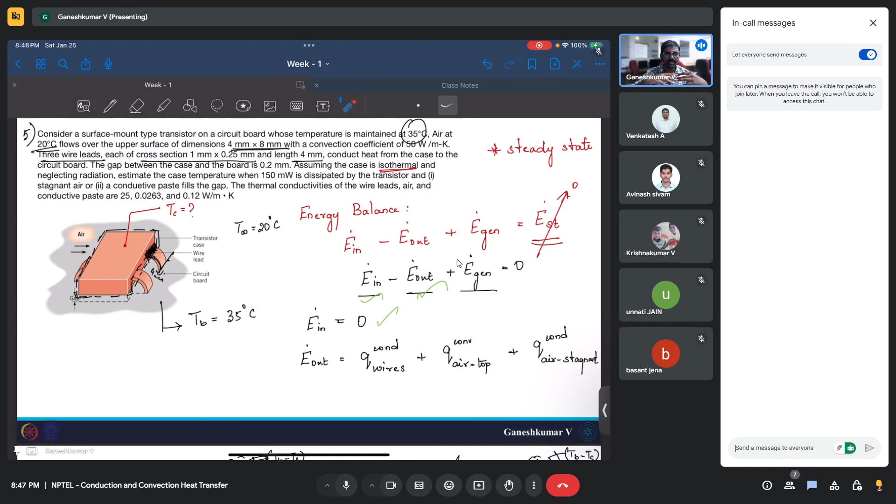If that increases, your temperature is going to... when you have paste, what is going to happen to the temperature if you change the material to a high conductivity material? It will reduce rapidly, right, it reduces. So actually when you use the paste, I was getting 39.9 degrees Celsius, but you can verify for yourself.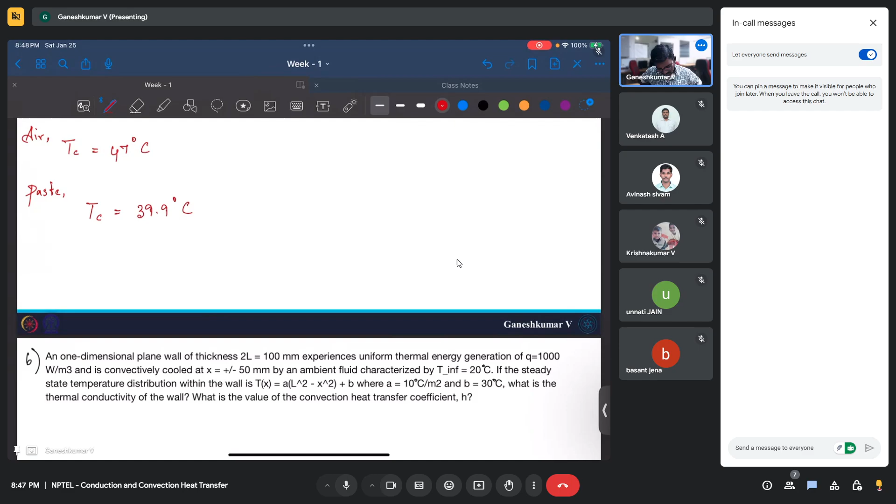So basically you just need to replace this K air with K conductive paste, 0.12. When you replace that over here and again equate it to the same 150, the generated heat is not varying. You will end up having a lower temperature, so you can see for yourself.

So that is why people, instead of just leaving it like that, fill it with the thermal paste so that they can reduce the temperature of the transistor.

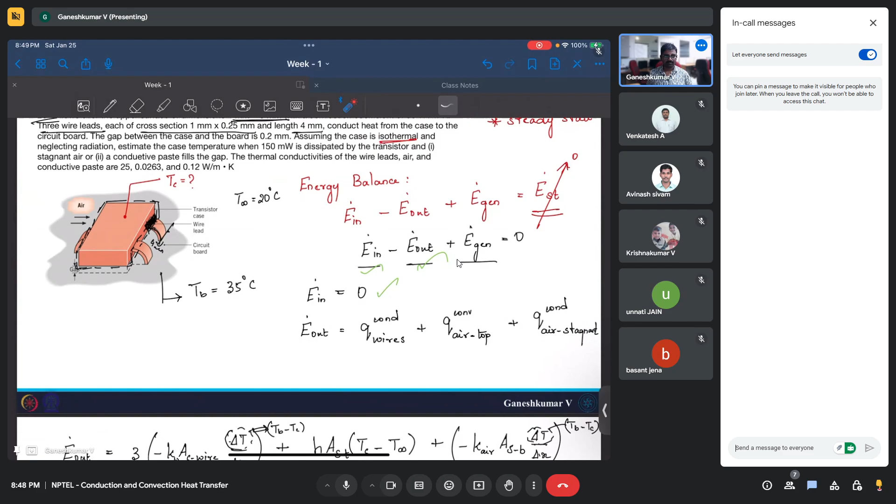So I have another question, but I think it is better discussed next week, because you will get additional information on this steady state heat conduction next week. So I'm going to reserve this question for next week.

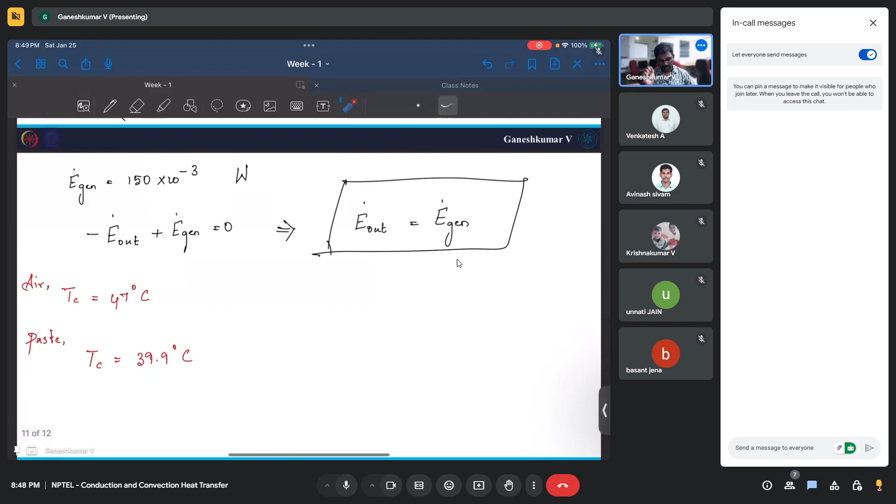Nevertheless, I strongly encourage you to finish problem 5. Try to think again, we know it was a little bit rushed, but think again how this energy balance is worked out and how the areas, temperatures, and distances are taken into account.

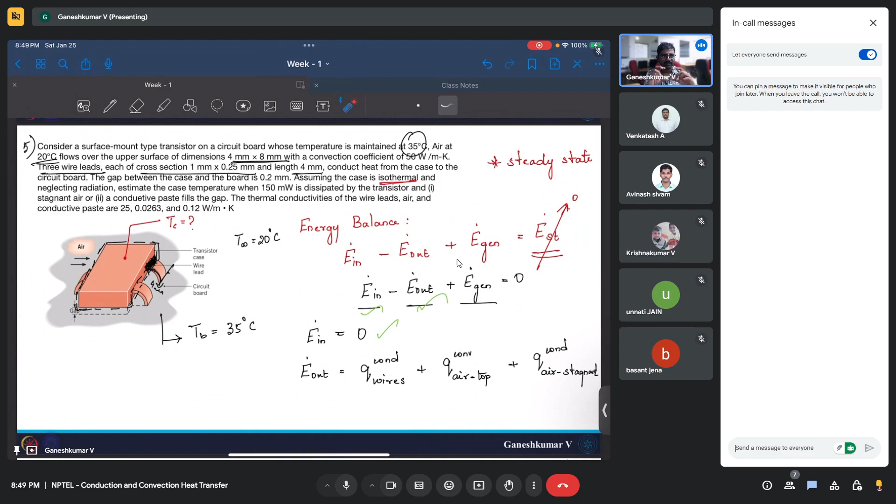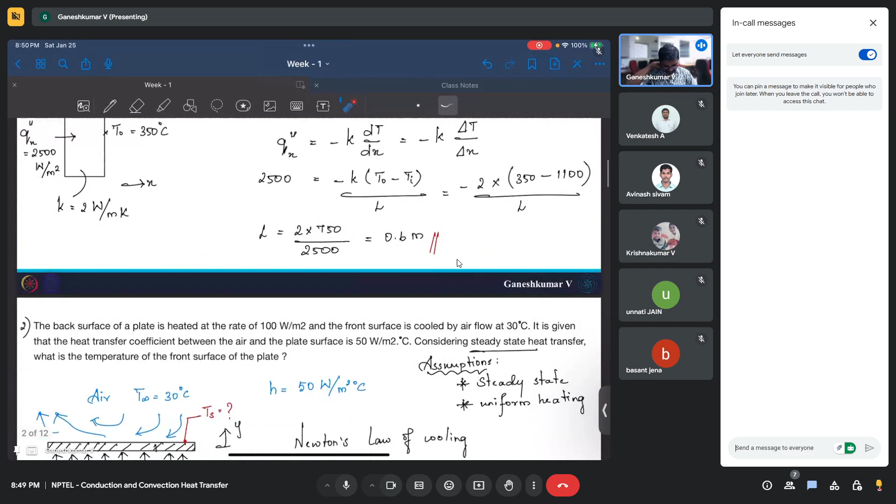Also, I encourage you to do some mathematics in the third and fourth problem, that will help you. Otherwise, I think the first and second are straightforward implementation, straightforward usage of Fourier's law of heat conduction and Newton's law of cooling. I think that is more than sufficient for your assignment.

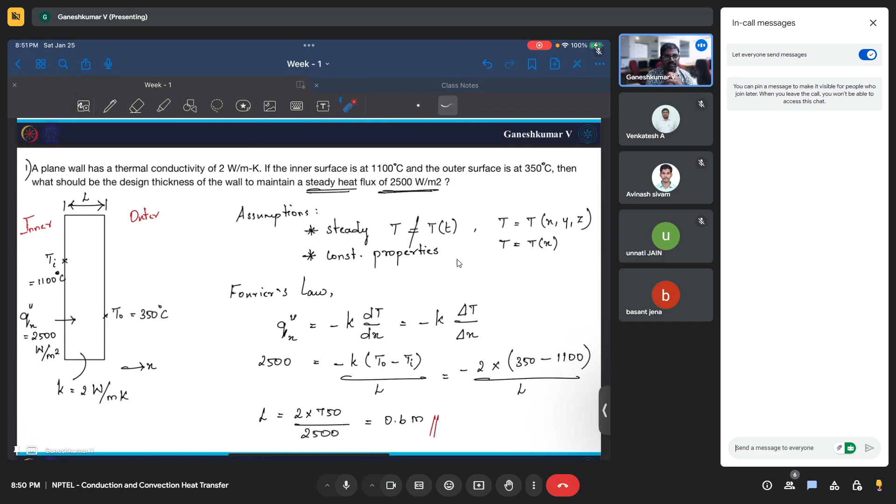Okay sir, thank you. All right, thank you very much. Bye bye. Yeah.

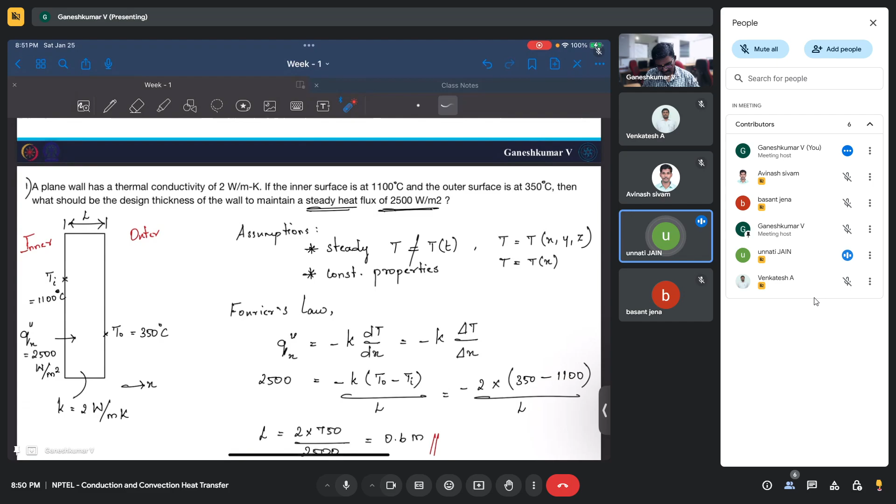Thank you, Venkatesh, Avinash, and Unnati also. I think Unnati Jain, you had some question. Yes, sir. Once I will read this PDF, I'll get to know.

I think there's a conceptual issue, just missing one equation in between. Okay, so basically, while deriving, the professor used some Tds equations and the Maxwell relations. Thermodynamics is one of the prerequisites of this course, so there you will actually read this and come up with these Tds relations and Maxwell relations, so that when you substitute those, you will end up having them, but you can physically understand it.

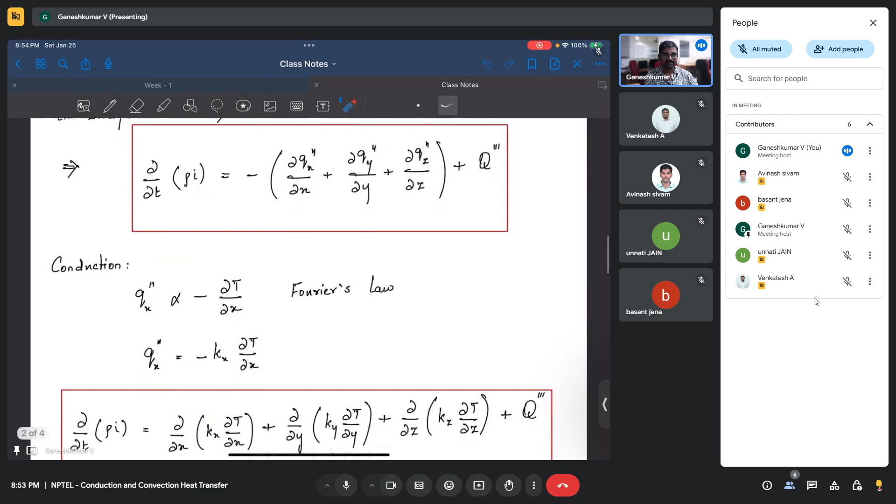Okay, could you please show the equation you have derived? Yes, this is the same equation that the professor derived in lecture 5. I just saw the lecture and then wrote this equation, nothing much. Can you check lecture 5? Yeah, it also has the same equation. Right, sir. Basically, I just saw the lecture and followed the process, because this can be derived in different ways. I wanted to know how the professor derived it, so that I will also follow the same thing while doing this problem-solving session, so that it will be easy for you to understand.

That's the reason I went through it and derived this. You can also do the same thing, and if you still have any questions, we will be heavily dealing with this for the next week, so most probably all your questions will be resolved. On Tuesday, there is another tutorial class, and we are going to again study this conduction only — we are not going to do week 2 again.

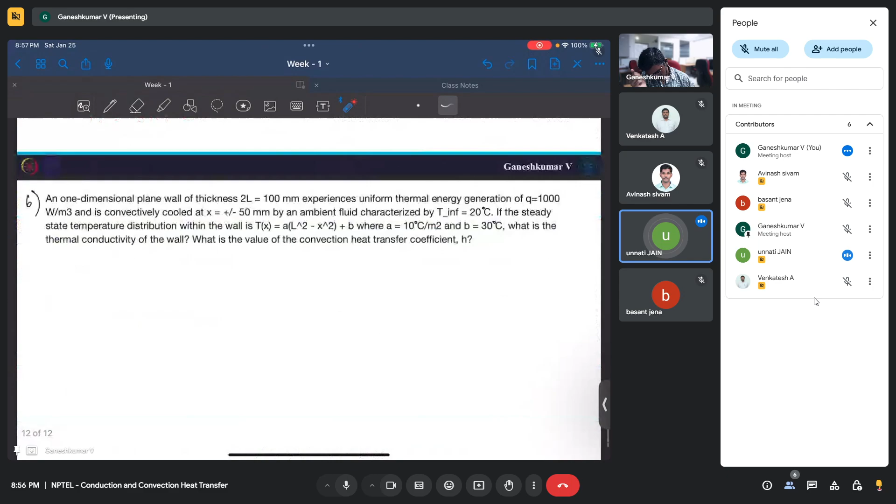Which program are you in currently? Are you a BTech student or a master's student? I am a BTech final year student, and I am going through an internship where I have to work on multi-phase. So I require knowledge - I don't know what topics will be required in multi-phase. What about you - is it computational or experimental work?

Are you going to do CFD kind of work, or are you going to deal with experiments on multiphase? Actually, I will be working on OpenFOAM. So basically it's CFD. I don't know the path, actually.

This is a fundamental course. Heat transfer is a fundamental course - you must have already studied it in your second or third year. This course will cover the same material you studied in BTech, it does not deal with any advanced level topics. It will go through the heat conduction equation, 1D steady state heat conduction, heat generation, fins, convection - internal and external convection - all the same as your heat transfer course. It is not anything advanced, so it has no relation with multi-phase flows, because multi-phase flows are very advanced - it is out of scope of this course.